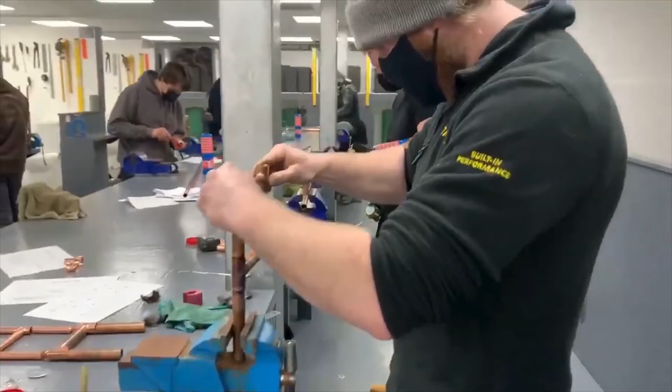Rule number 1. Don't forget what you already know. Firstly, don't forget what you already know. Installing Flexigas is almost exactly the same as installing copper or rigid steel. But many installers forget this key point when they start using CSST, and this can create unnecessary confusion. So remember, you already have the foundations for installing Flexigas.

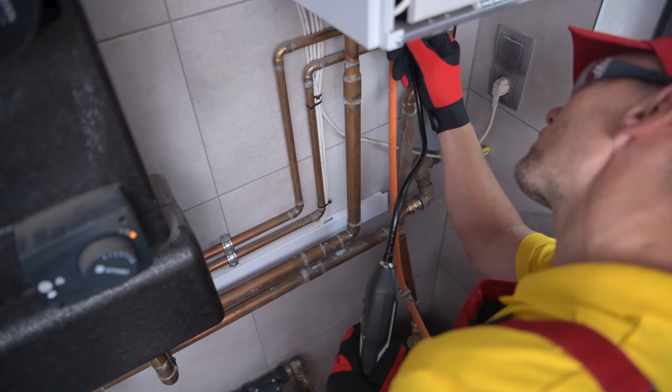There are only minor differences between how to install copper or rigid steel gas lines and how to install Flexigas, which we will cover in this section. When it comes to installing Flexigas, many things are the same as with rigid tube. IGEM and BSI regulations make virtually no distinction about how and where copper and CSST or Flexigas installations are made. They largely treat all gas installations the same, using the term pipework throughout the codes, and leaving it up to the gas installer to choose between what type of tubing material they prefer.

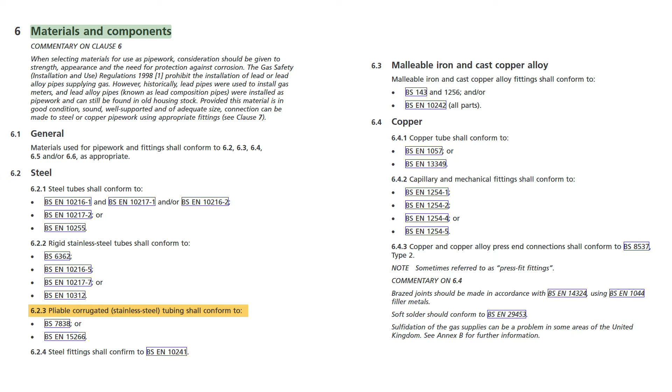For example, how to pass through walls? Same. How to install in the ground? The same. How to install in floors? Same. And importantly, how to ensure ventilation? The same. So, when facing any installation scenario, rather than thinking, how do I do this with CSST? You should first think, how would I do this with rigid tubing or copper? And the way you should install Flexigas in most cases will be the same.

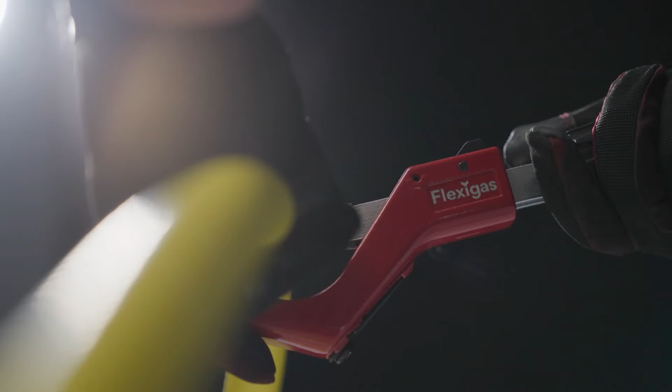Installing Flexigas, a step-by-step guide. The biggest difference between rigid tube and Flexigas installation is how to connect a fitting with the tube. So let's get into that. 1. Cut the Flexigas tube. Use a wheel metal pipe cutter to cut the Flexigas tube, ensuring a clean and centered cut in the valley between corrugations. This is actually one of the most important steps. As you rotate the cutter, give just a quarter turn each time around.

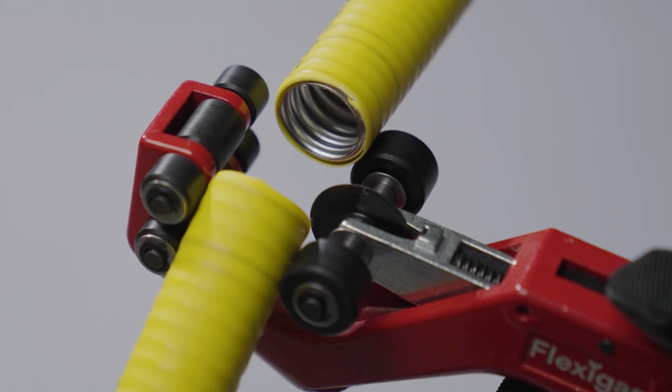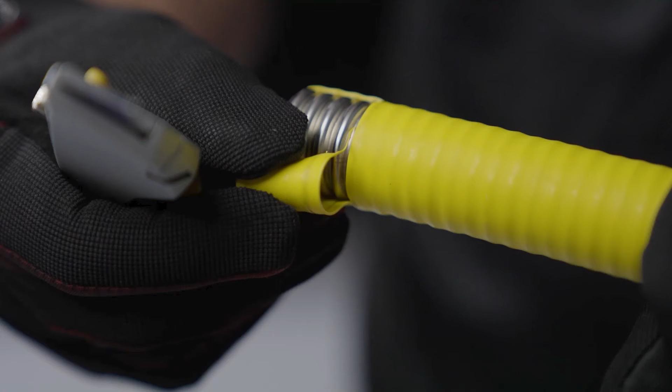For best results, use a Flexigas cutter, which has support wheels on each side of the cutter, specially designed for Flexigas tube. Do not use copper cutters or hacksaws, as these will provide a cut that will not seal. After the cut, the tube should be perfectly circular, with no sharp burrs or edges. 2. Remove the flame retardant cover. With a utility knife, remove the yellow cover, exposing the last 4 corrugations.

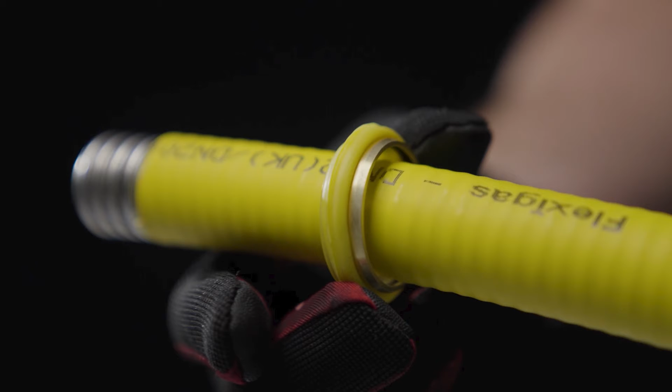3. Put the optional FG wrap sleeve in place. This is an optional extra, and silicone tape can be used instead. But if you choose to use FG wrap, make sure you put the FG wrap sleeve onto the tube the right way around, with the brass lip facing forward.

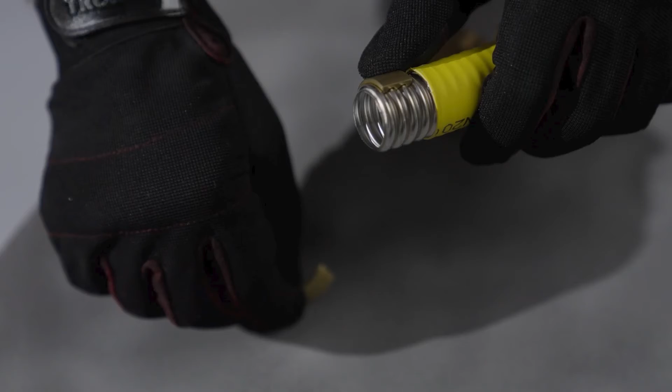4. Slide on the nut and collars. Place the nut over the tubing and position the 2 semicircular collars around the tubing so that the ridges on the collars occupy the last 3 valleys. Important, make sure that there is 1 corrugation ridge in front of the split collars.

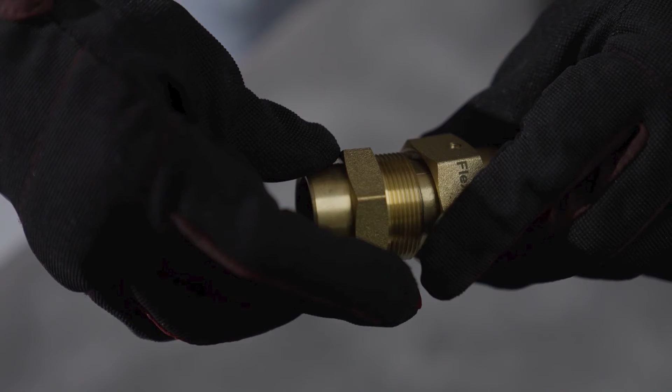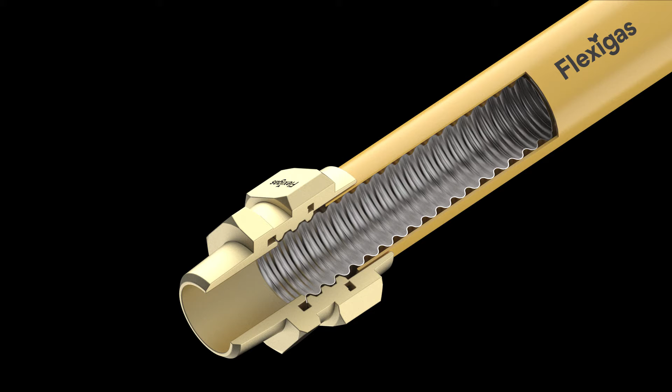5. Tighten for a secure seal. Using 2 suitably sized wrenches, tighten the nut and fitting to create a secure seal without the need for specialist tools or soldering. For larger DN sizes, you should use large gauge wrenches or Stilson wrenches. You need to apply enough torque to make sure the last corrugation is flared against the seat inside the fitting, so use those muscles. Note, no sealing compound or paste should be used.

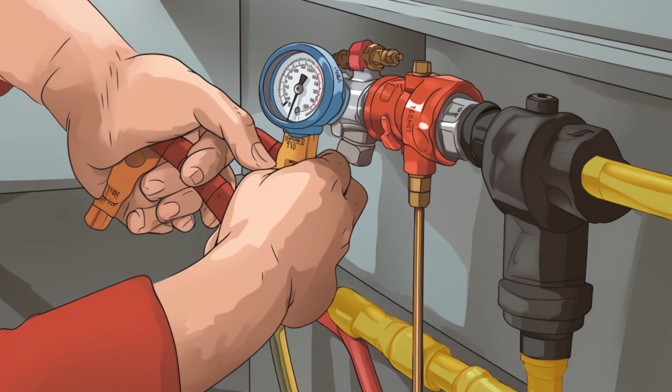6. Gas tightness testing. This is the time for gas tightness testing. Importantly, do not do any additional steps until gas tightness testing has been completed. 7. Wrap the tail. After conducting a gas tightness test, wrap the small gap between the nut's tail and the tube either by using yellow silicone tape or by using the FG wrap feature. If using FG wrap, push the brass ring down until it clicks onto the tail of the nut and give it a little quarter turn.

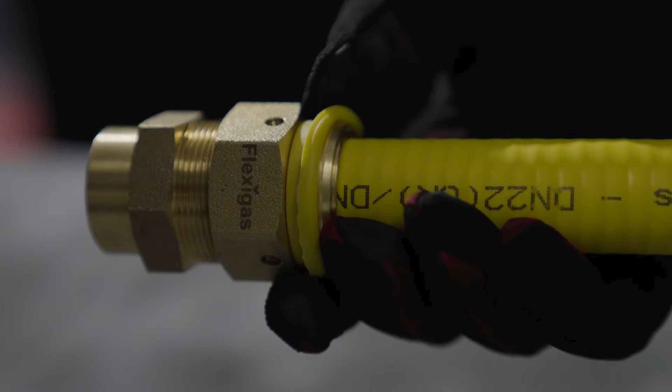Afterwards, unroll the sleeve to cover the gap between the fitting and the tube. Important: the silicone tape and the FG wrap serve no purpose in making a gas seal. Their only purpose is to prevent bleach or some other corrosive chemical from making contact with the stainless steel tube. You should always conduct gas tightness testing before attaching any silicone tape or FG wrap.

Earth bonding, an important step that is often missed. Proper bonding is essential for all gas installations, both rigid gas lines and CSST or Flexigas. We see far too many gas installations with incorrect or no bonding at all. Don't just leave this step to the electrician; it's best to make sure this step happens yourself.

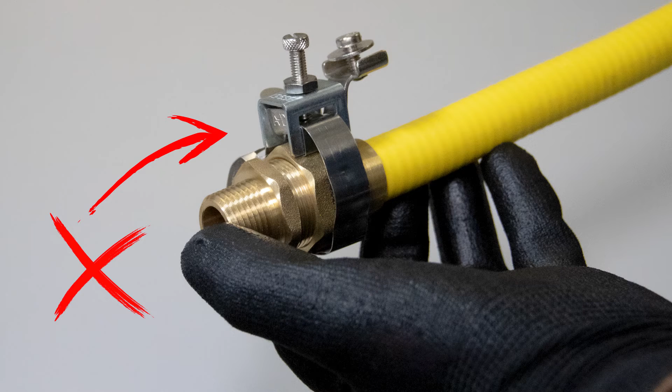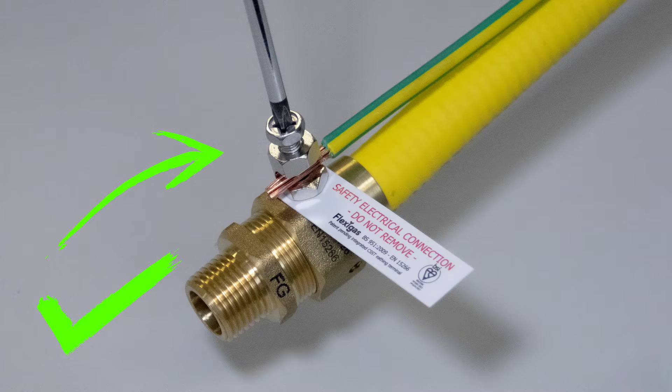Unlike for rigid tube, when using any CSST including Flexigas, you must not attach a bonding strap to the CSST or the fitting. When using CSST, you have 3 options for earth bonding. 1. Use a bonding clamp designed specifically for attachment to brass fittings. 2. Switch part of your installation to copper tube so that a bonding strap can be attached to a copper part of the gas installation. Or 3. Use the Flexigas FG Bond feature, which is the easiest and safest way to bond your installation.

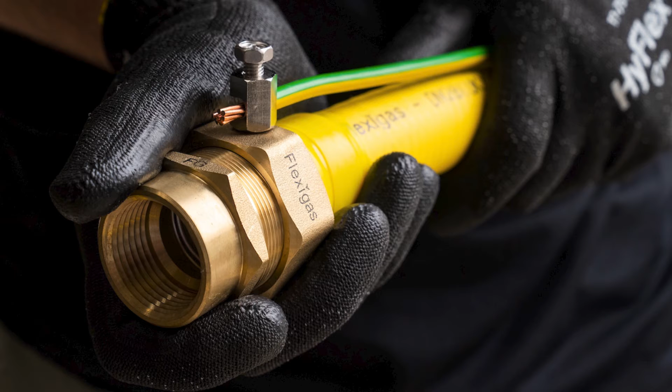FG Bond, the safest way to bond your CSST installation. Flexigas offers a patented and unique safety feature called FG Bond, which allows an easy and secure way to bond your CSST installation without using bulky, oversized bonding clamps, or having to switch to copper tube for part of the installation. Each FG Bond kit uses an earthing terminal and a BSI-compliant label.

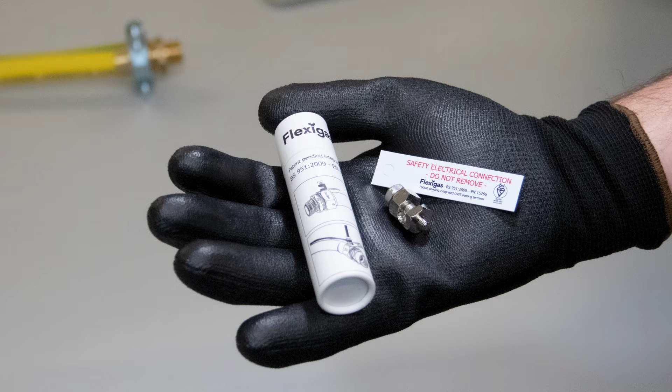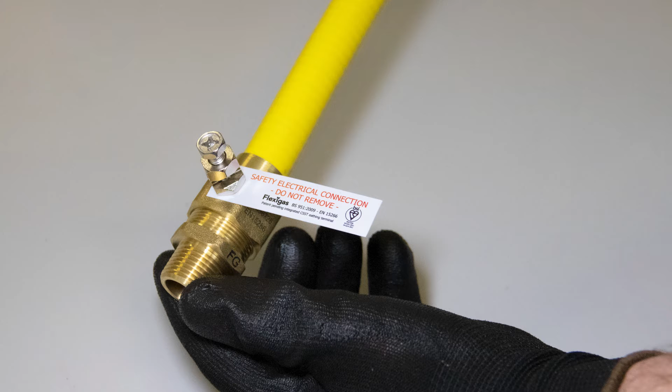To attach FG Bond, 1. Attach the earthing terminal. You may have noticed that all Flexigas fittings have 3 holes around the outside of the nut. Attach the earthing terminal into any one of the pre-drilled holes found on all Flexigas nuts. Make sure the BS951 compliant label is attached between the earthing terminal and the nut.

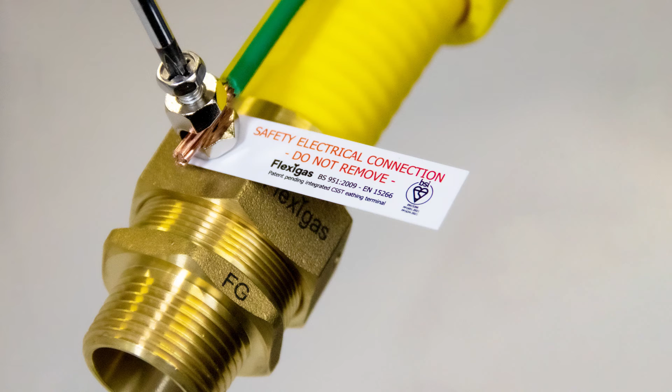2. Secure the copper wire. Screw down onto a stripped length of copper wire. BS6891 requires a minimum of 10mm wire be used. The FG Bond system is tested and certified by BSI as a bonding clamp and meets BS951 requirements.

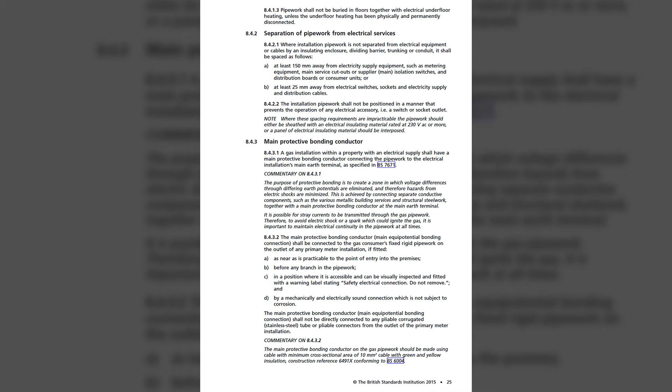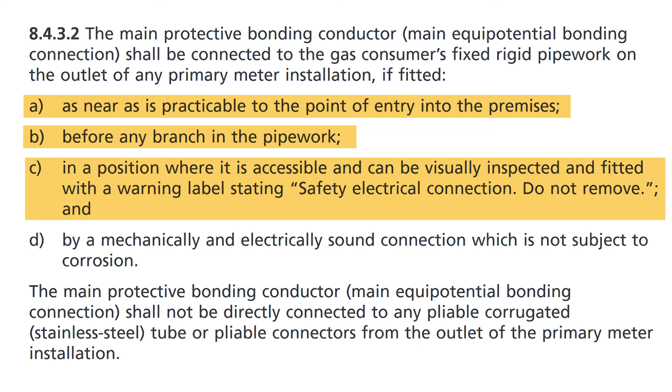Bonding clamp location requirements. The same standard requirements apply for the bonding clamp location. Whether using the FG bonding system or a traditional bonding clamp, the bonding clamp should be as close as possible to the point of entry into the premises, before any branch in the installation pipework, in an accessible position where it can be visually inspected and fitted with a warning label stating "Safety electrical connection, do not remove."

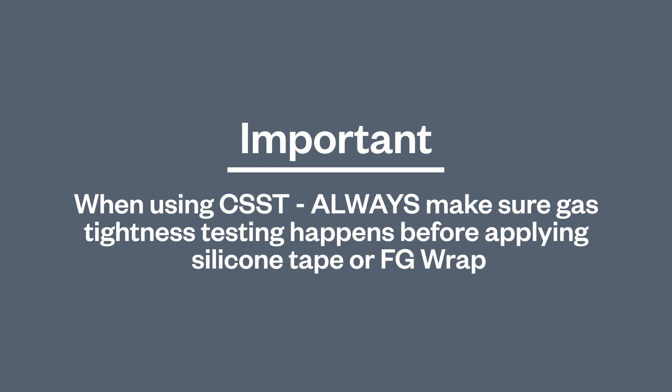Revisiting the importance of gas tightness testing. It is critical to conduct gas tightness testing on all installed gas lines, but also when using CSST, to conduct this testing at the correct installation step.

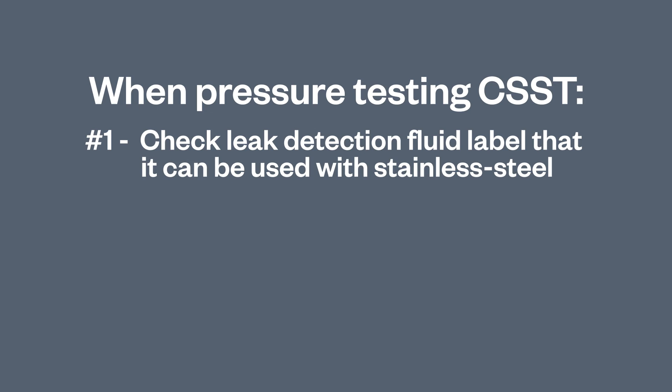Preparing for gas tightness testing. Before conducting your gas tightness testing, please take note. 1. Avoid using leak detection fluid that may damage stainless steel or contains high levels of chloride. 2. Make sure the silicone tape or FG wrap has not been installed and does not interfere with the gas tightness testing process. 3. Do not apply silicone tape until after the gas tightness testing is complete. If using the FG wrap feature, ensure it is well down the line and out of the way before conducting any tightness testing.

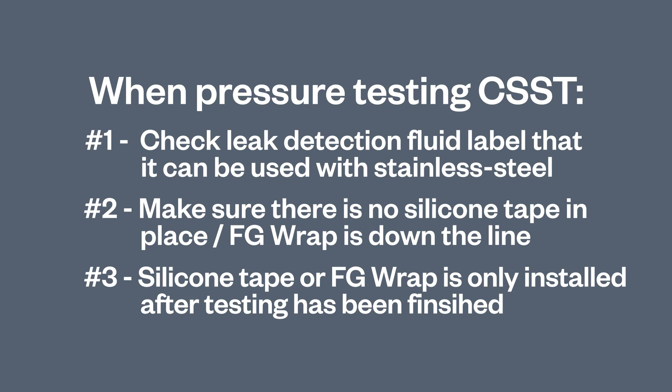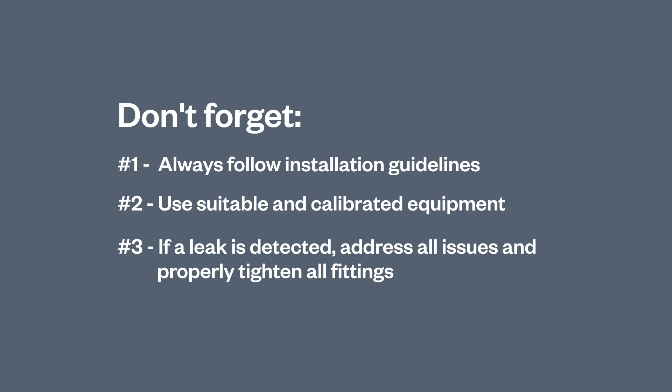Conducting the gas tightness testing. 1. Follow the guidelines outlined in IGE/UP/1B for tightness testing and purging of domestic-sized natural gas installations. 2. Use suitable equipment and procedures to accurately measure and verify the gas tightness of the installation. 3. If any leaks are detected, address the issue and retest to ensure a safe and reliable gas supply.

Damaged tube? No problem. Accidents happen, but that doesn't mean you have to scrap your entire installation. If you spot a tear or damage to the yellow cover, don't panic. Just follow these simple steps. Step 1. Check the CSST. Make sure to check the stainless steel tubing inside for any damage or punctures.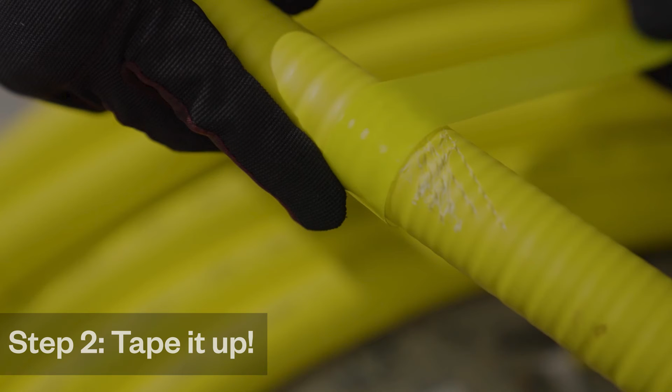If the steel tubing is damaged, you'll need to cut that section out of the installation and redo that part of the installation. Step 2. Tape it up. If the stainless steel part of the tube is undamaged, simply wrap the damaged area of the yellow cover with at least 2 or 3 passes of silicone tape. This will keep any corrosive materials from coming into contact with the stainless steel tubing.

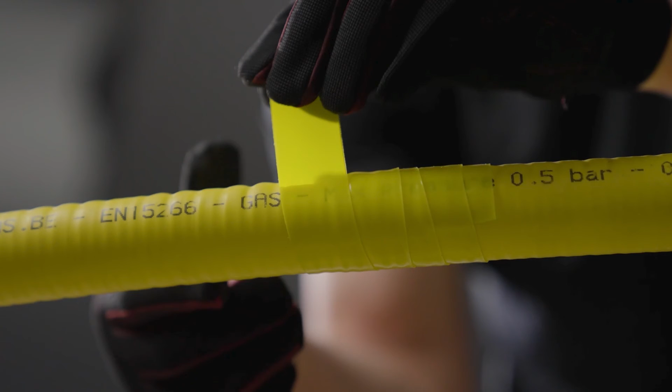Step 3. Carry on. With the damaged area fixed, you can carry on with your installation without any interruptions. Pipe supports, ensuring proper support for CSST. Due to its flexibility, CSST requires more frequent support than rigid tubing.

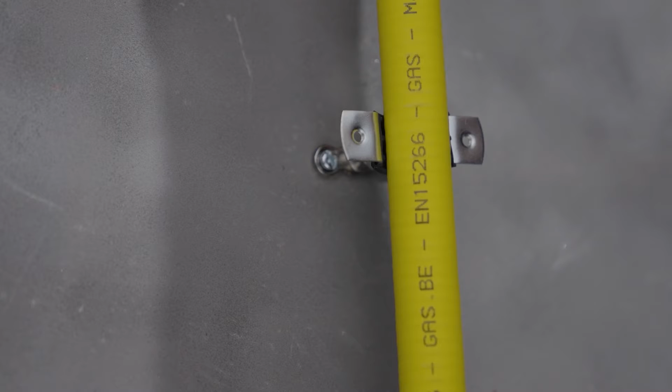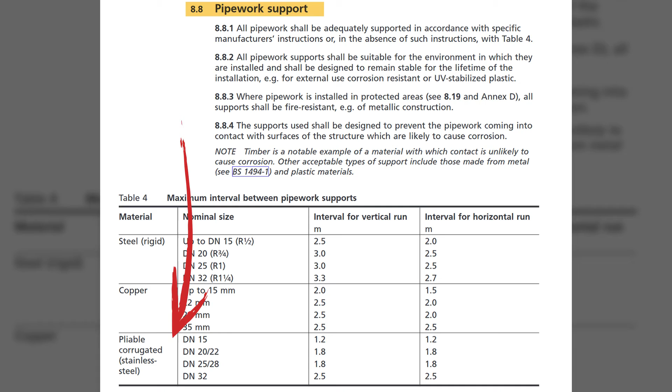To secure the tubing, it's essential to use metal Munsen rings or clips, or use a joist and other supports as per Flexigas installation manual, BSI or IGEM regulations. Here's a table outlining the recommended distances between supports for CSST, also available in the installation manual.

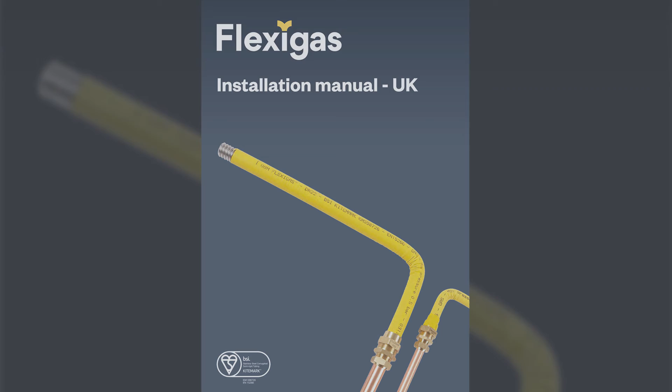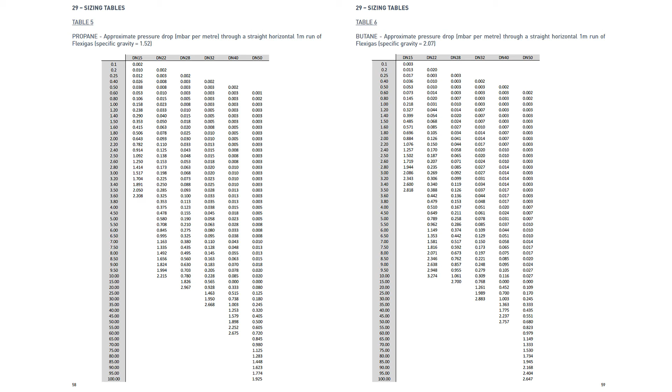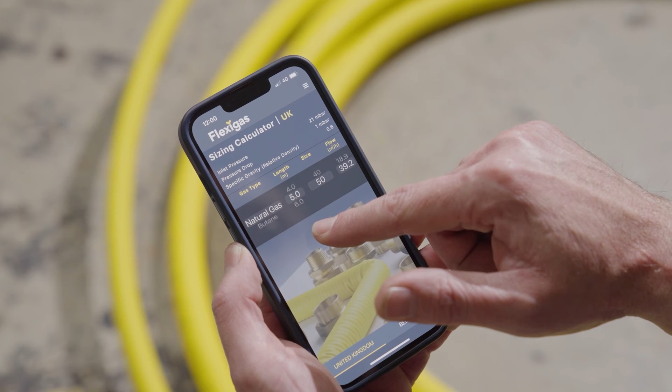Flexigas Sizing App. To make the sizing process easier, we offer a free sizing app that's perfect for jobs with a single length of tubing, running from the meter to the gas appliances. You can download the app and use it to determine the correct pipe size for your installation.

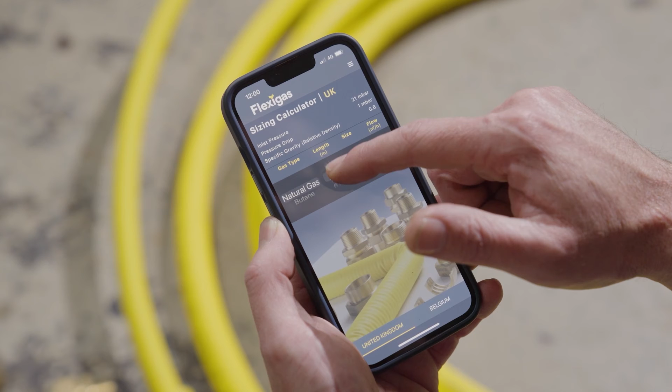In the sizing app, Flexigas uses meters cubed per hour as its primary measurement, rather than kilowatts. You can convert from meters cubed per hour to kilowatts using a formula, but it's always best to check the peak meters cubed per hour requirement for the specific appliance you're installing.

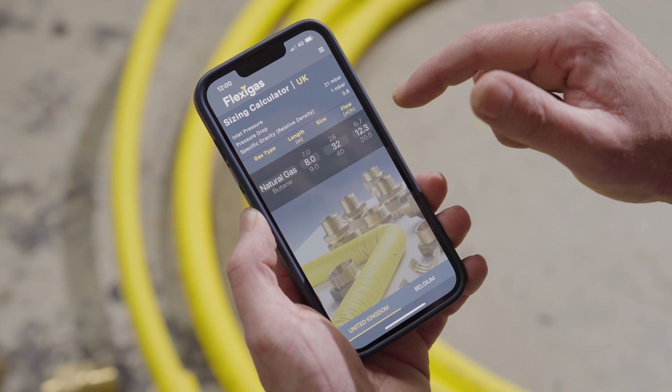The main reason is that the peak meters cubed per hour requirement may vary between different boiler manufacturers, even for the same advertised kilowatt boiler. You can find this information on the spec sheet or manual for the gas appliance.

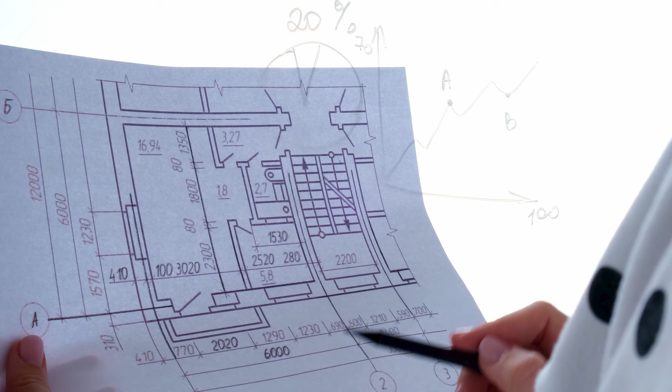Free sizing and consultation service for complex installations. For more complicated installations, please don't hesitate to contact us for our free sizing and consultation service. Our experts are here to help you determine the appropriate sizing for your Flexigas CSST installation.

Navigating unventilated areas with CSST. When handling unventilated areas, stick to your copper experience. Flexigas offers a pre-ventilated product for passing through unvented areas, called Flexigas DS, but it's not always necessary.

When dealing with any unventilated area during a CSST installation, remember rule number 1. Don't forget what you already know. Remember your experience with copper or rigid tube. You can tackle any unventilated area in the same way as you would with copper.

Instead of immediately considering a pre-ventilated product, think about how you might ventilate the area or construct a duct, just as you would with rigid tube, before considering a pre-ventilated CSST product like Flexigas DS. For example, when encountering a small unventilated area, it may be more cost-effective to use standard CSST and build a small duct vent.

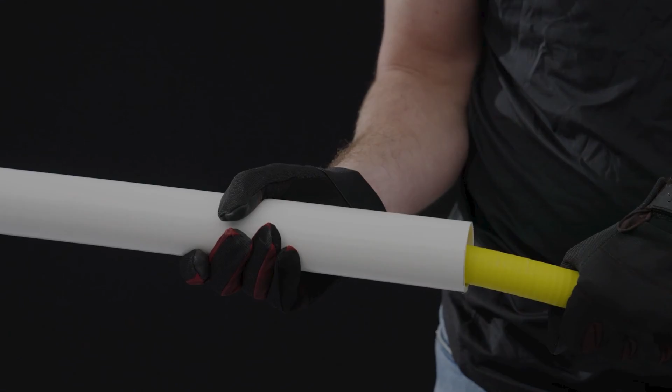Or it might make sense to pass the CSST through a small length of sleeving to pass through the unvented area. This approach can save you money compared to using a pre-ducted product.

So don't forget what you already know about how to plumb gas pipework. And if you do have any doubts, all the above scenarios are covered in our Flexigas installation manual. This completes Module 1. There will now be a short quiz on the material covered. In the next module, we will cover pre-ventilated products like Flexigas DS, which can be useful in some installation scenarios.